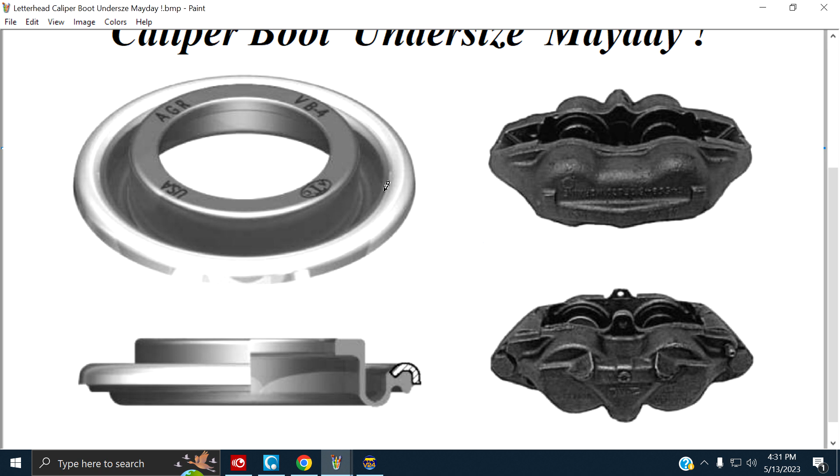Anyways, let's get that out of the way. See this hard boot here on the left? It presses into the bore in this caliper. It's a 4-piston caliper, I'm showing it. One way is up and one way is down. It's upside down, see it? This one here is up and that way is down.

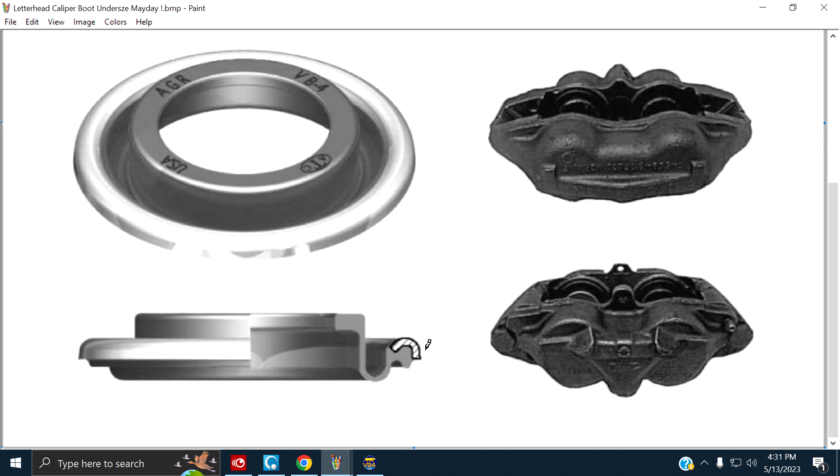Here's a cross section of the boot. I cut out a section here, and that little black outline there shows you the metal. Alright, are you getting my drift?

Alright, I'm gonna lay some shit on you. Hang on. Alright, I'm gonna take you to my CAD system. I'm gonna show you that boot. Alright, first of all...

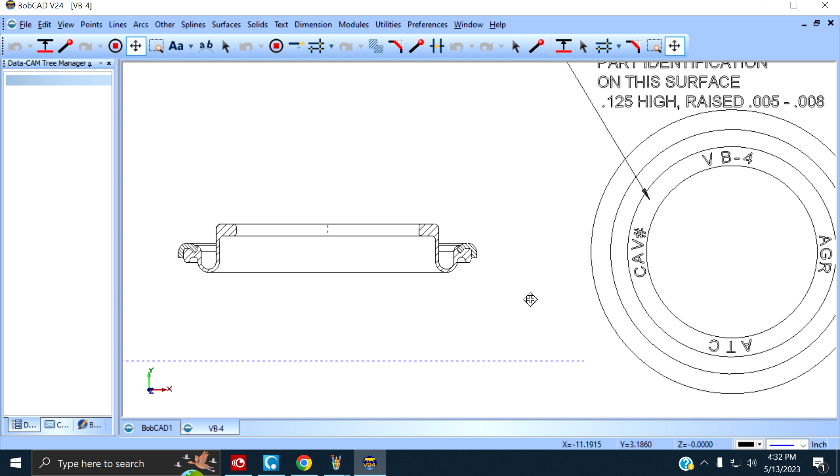This is a top view of the boot. It shows the identification on it: the part number VB4. What's that? Vintage boot number 4. That's the AGR manufacturer's code. That's the cavity number, and that's the company identification, Acushnet Tool Company.

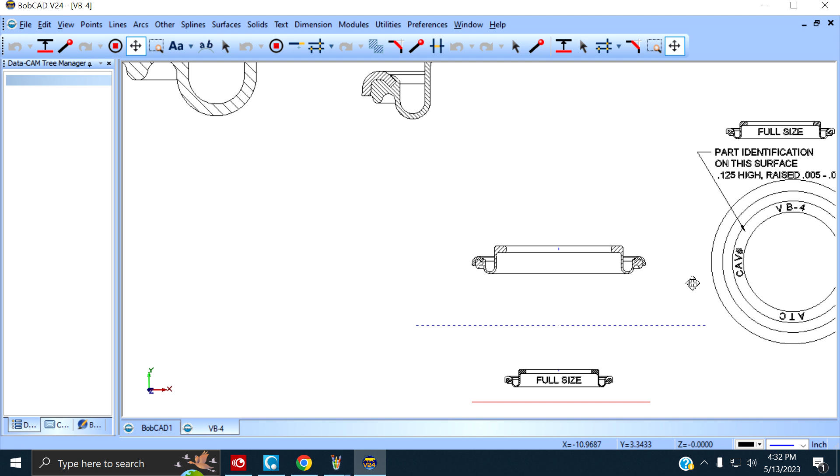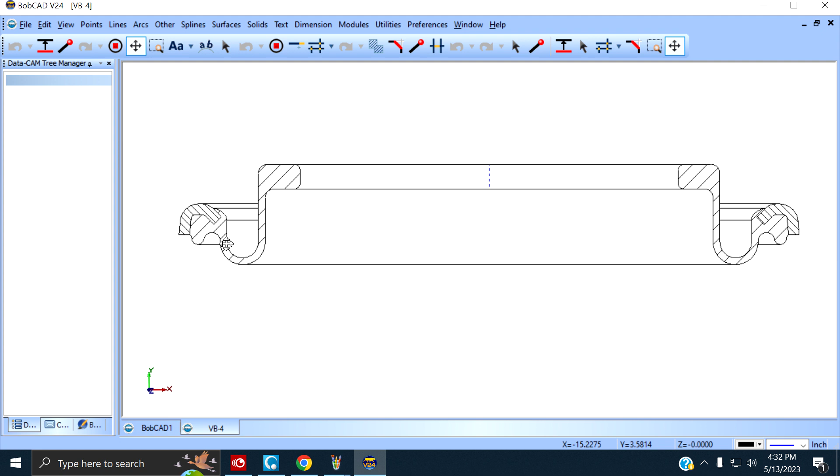I'm going back now, back to 2003. We still do this, you see that? That's a cross section of this view here, see, it's a cross section. The hash marks or cross section marks are showing you that's all rubber. This is showing you it's steel.

Let me get down to where I'm working. My objective is, well, let me get you down here. I'll start with my bullshit down there, it's my scribble sheet, I scribble all over the place. Let me start here, I'm showing the boot upside down.

The problem, you see where the mouse is? That diameter from there to there is 10 thousandths of an inch too small. We got a lot of them in stock. Somehow it got by us, and we got quite a few in stock and customers that want the product.

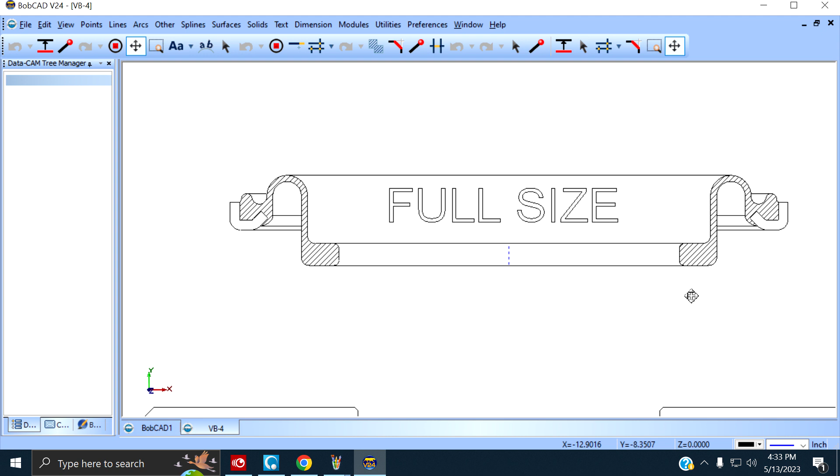It's an easy fix: build the new die and stamp some new ones. Problem is the time involved to get it done. In the meantime, customers are not too eager to wait. So what I gotta do is make these bigger by 10 thousandths, and I'm golden until a die can be built. You see that? Okay? How am I gonna do that? Let me show you.

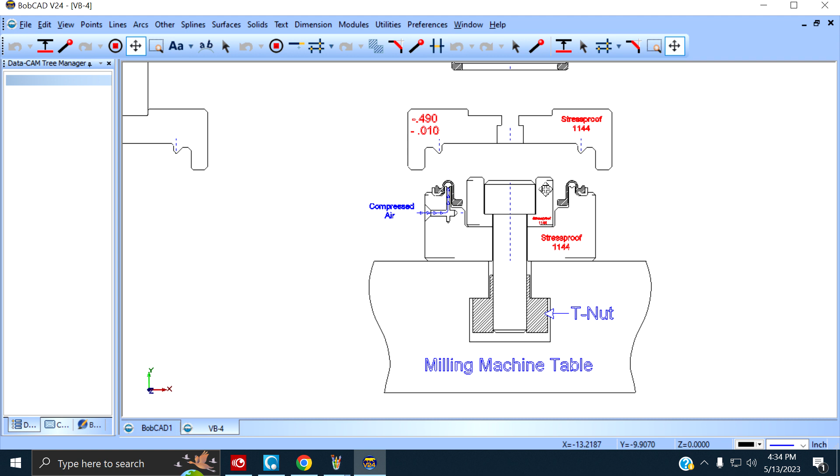Alright, let me just do this. You see 2 parts here, one above the other. You see a milling machine table here, see it here? It says milling machine table, T-nut. These are all round parts. They're made of stress-proof, 1144.

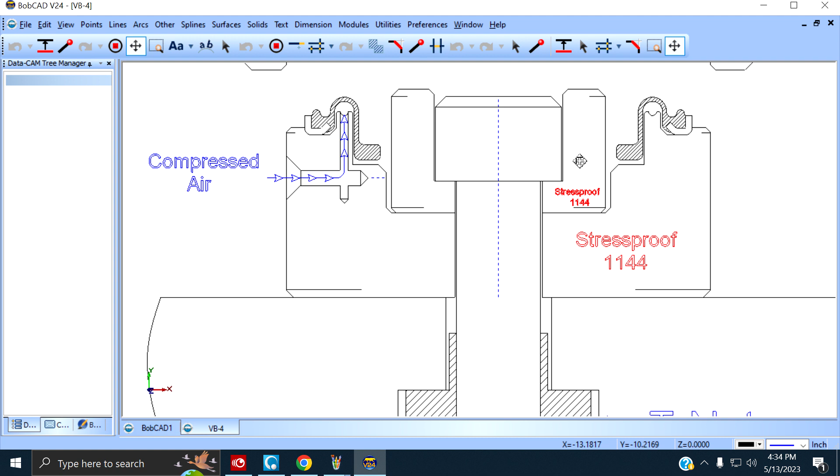You can see this one and this one. There's only 2 metal parts here. That's a 1/2 inch 20 socketed cap screw. Alright, I'm showing you that.

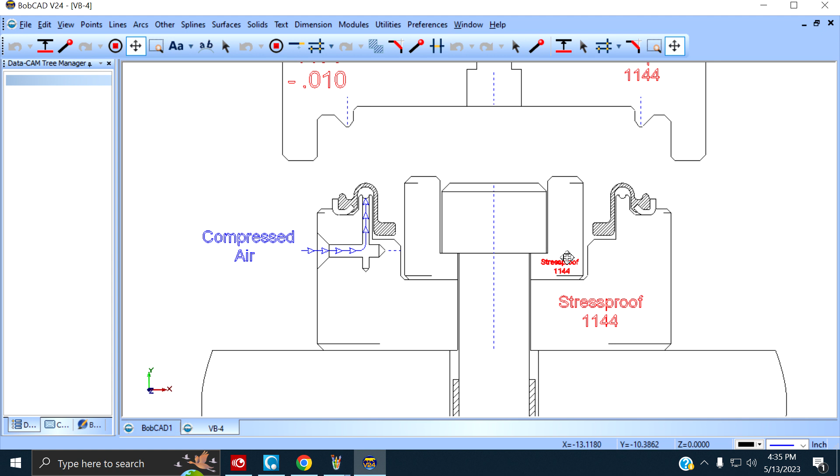Now this can come apart. You can see this piece here can lift off, right? Right now, that piece and that screw are pulling all down on the table, so it's secured to the table. Alright, let me show you the piece above it.

Obviously, stress-proof 1144, alright? It's a match for the bottom, same material. Why? Low carbon, good machining, tough material. Perfect material for this job, alright?

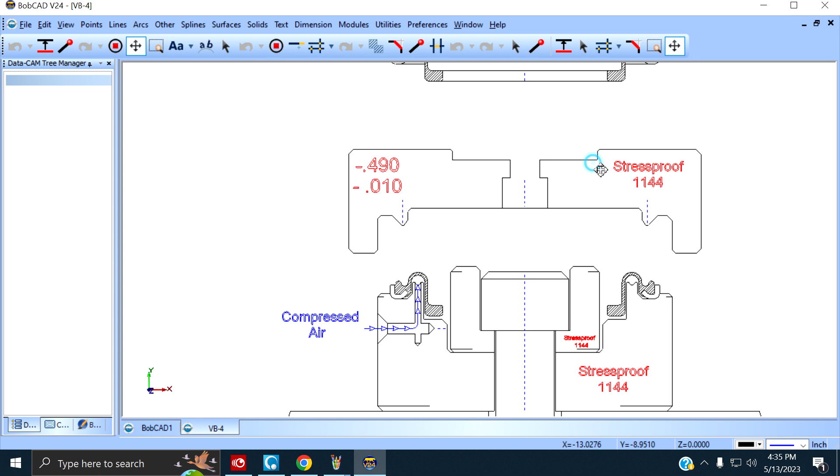How am I? Now here's what I gotta do here, see it? Here's a cross section of the part on one side only. I gotta take this metal, this is metal, this empty place, and I gotta bend it out this way by 5 thousandths.

Can it be at an angle? Absolutely, alright, not a problem at all. Matter of fact, I prefer it at an angle. So how do I bend it? Right, how do I bend this out this way?

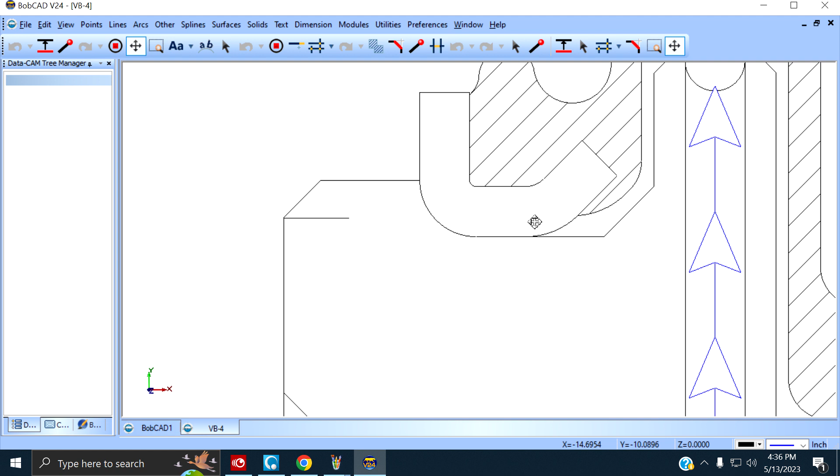Alright, well what I've done is I've contained it, you can see it here, in this metal, and I'm going to push it this way at an angle. Let me show you how I plan to do it. Maybe you guys got a better idea, but I'll show you. Alright.

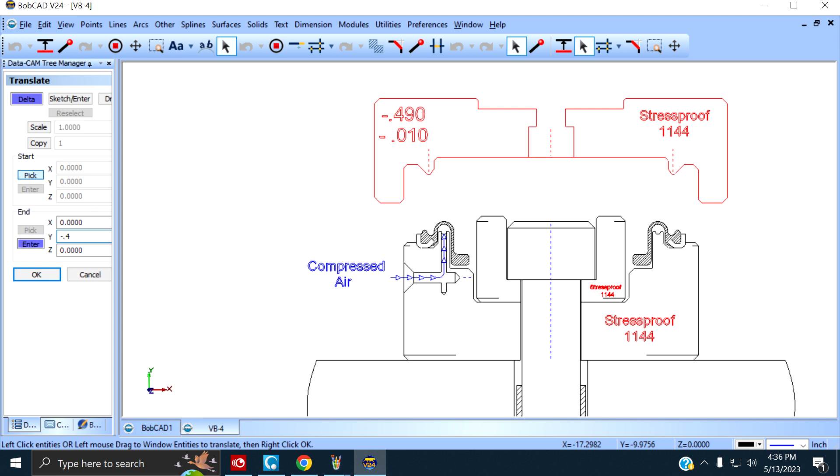As you can see, that's an angle, that's 45 degrees right there. Obviously, the other side is 45 degrees too. It's symmetrical, all right?

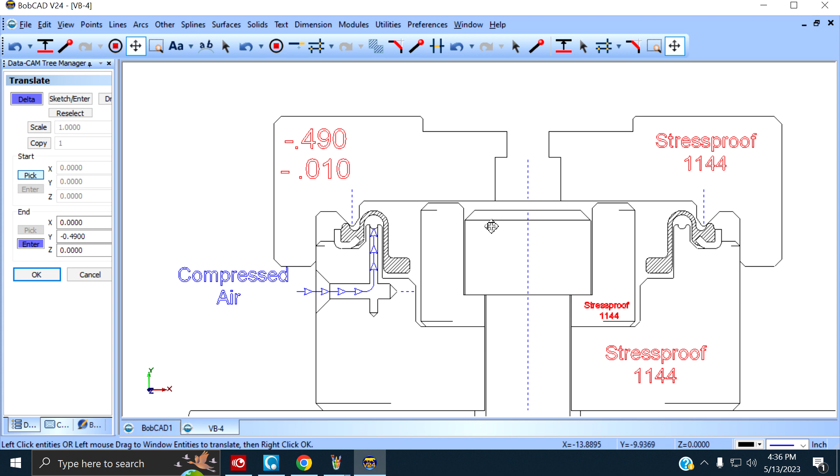You see it? It's just touching here, but you notice there's a gap here. See the gap above this piece? That figures into the picture here. I'm going to show you what I plan to do. Let me go back.

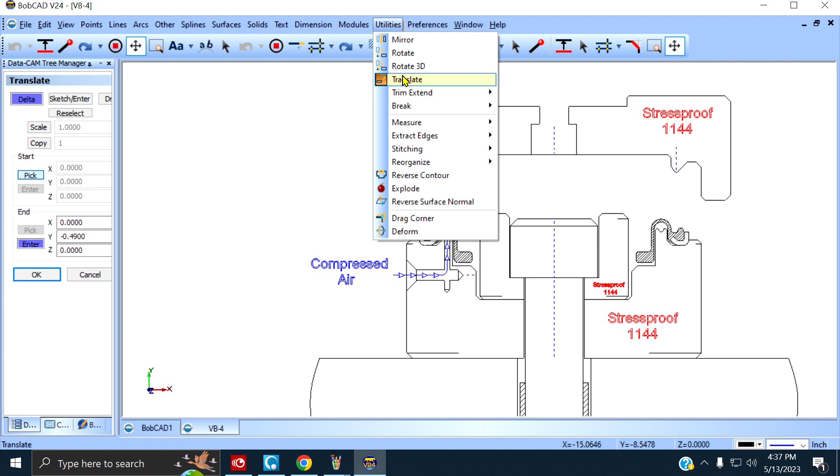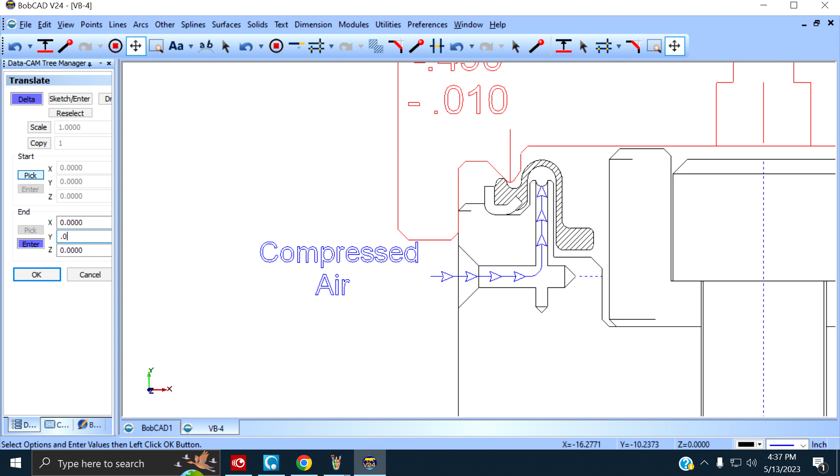Now I'm going to show you, I'm going to come down this way. Oh, by the way, you see this red? This diameter, this ID, just fits over that OD, holds everything in line. We use the term register - it lines it up anyway. Let me do this. I'm gonna drop it down some and show you a little bit of the action here.

Oh shit, hang on. I do that a lot.

Now I'm gonna push down 10 thousandths. See it? 10 thousandths, 10 thousandths. Obviously this rubber's gonna go this way and everything's gonna tend to go that way, right? I don't think it's gonna take a hell of a lot to do it, you know. But anyways, that's my plan, okay?

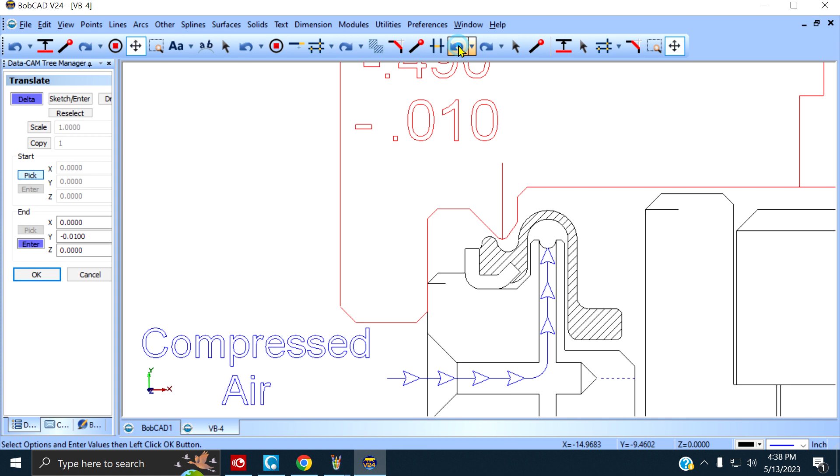Well, let me show you this now. Let me get this out of the way. Now, here's what I'm saying. You see this? The top of this, which is above. Let me do this.

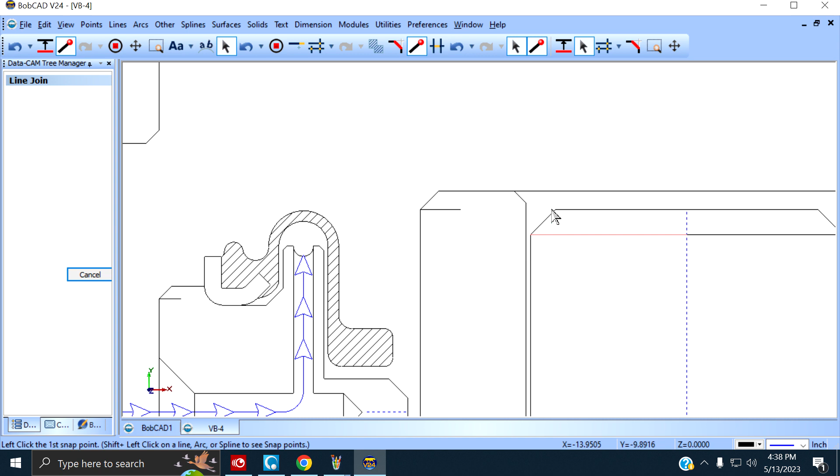You see the head of the cap screw is quite a ways from the top of that surface. I can take some off of that surface and not affect the socketed cap screw. Let me bring this down to where it just touches.

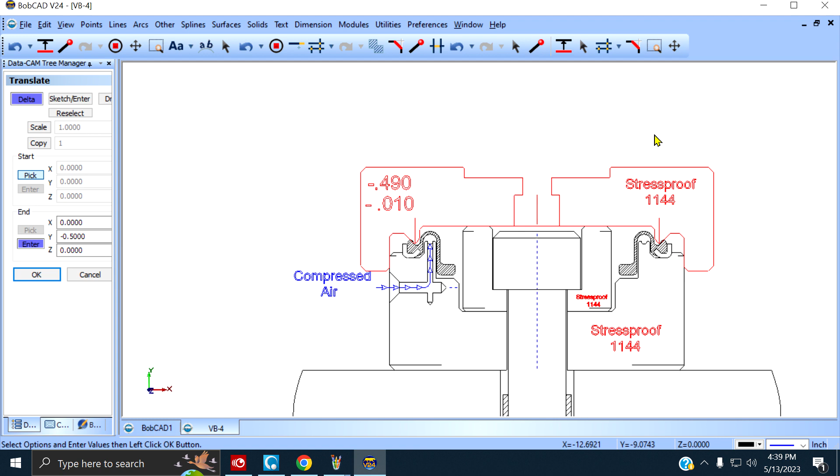See that this is touching there, right? And you can see that this angle is just into that rubber by a little bit, right? Obviously, I'm going to push down. If it doesn't move, I'm going to remove it.

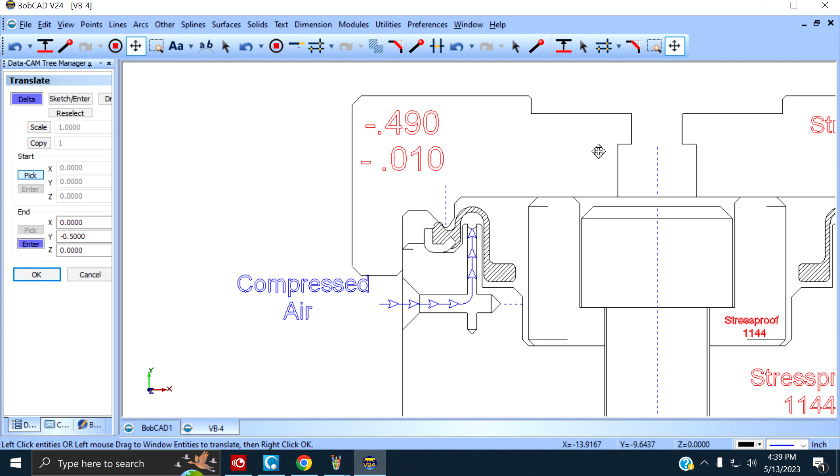Take this piece out, see this piece here? Take it out, face a little bit off, put it back in. I may have to do it multiple times, but once I get that out 5 thousandths, it's fixed, no problem. All I have to do is push down to the stop. How do I do that?

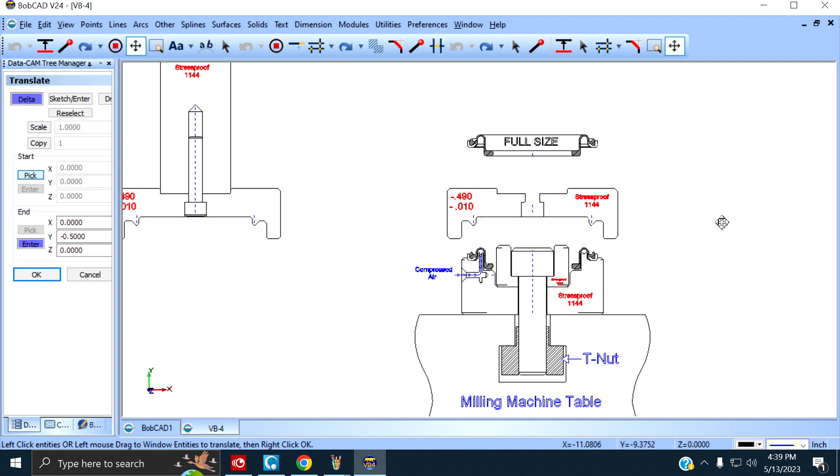Now, this is a logistical nightmare. How do I load it and unload it? Let me lay it on you.

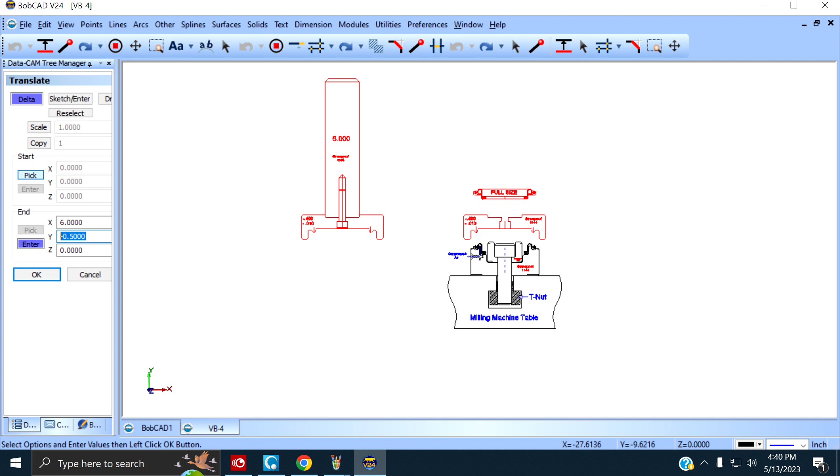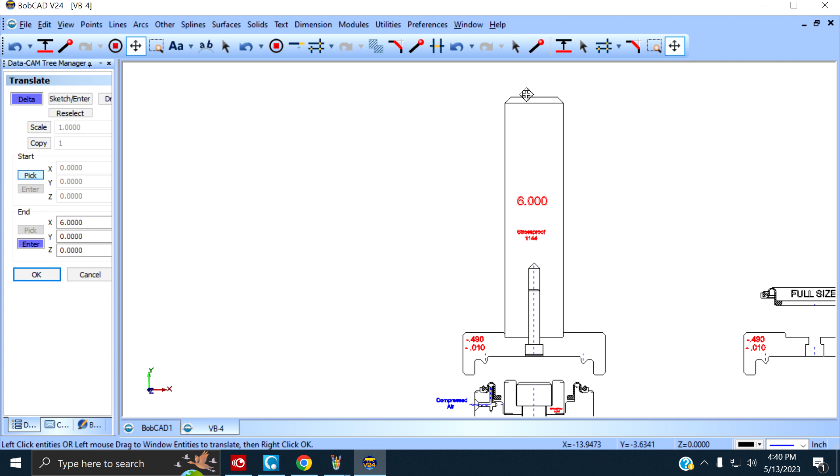All right, you see this? That's the handle. It's 1.25 inches diameter, and it's tall, so a guy can hold it in his hands, have the top sticking above his hands, so he can just hold it.

And then what he does is he drops it on here. It's guided in by this OD, and he gives it a whack with the hammer. It hits the stop. He lifts it up. Only takes a couple of seconds, right?

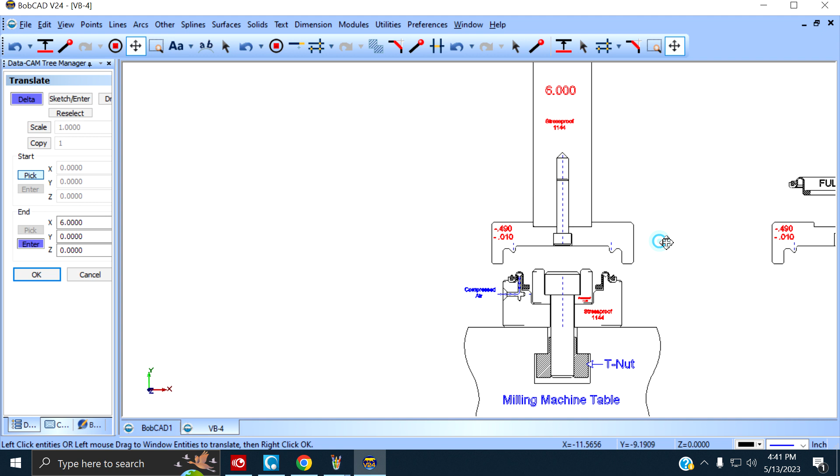So here's what I got in mind. I'm going to drill one hole, as you can see, a vertical hole, as you can see. And I'm going to make an annular groove. See that radius? That's a groove all around.

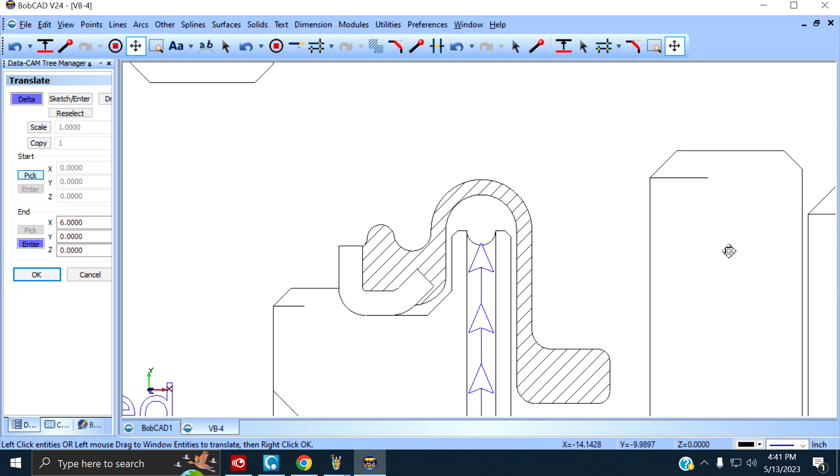Let me take you to this side. It goes all the way to this side. You see it? So it's circular around the part.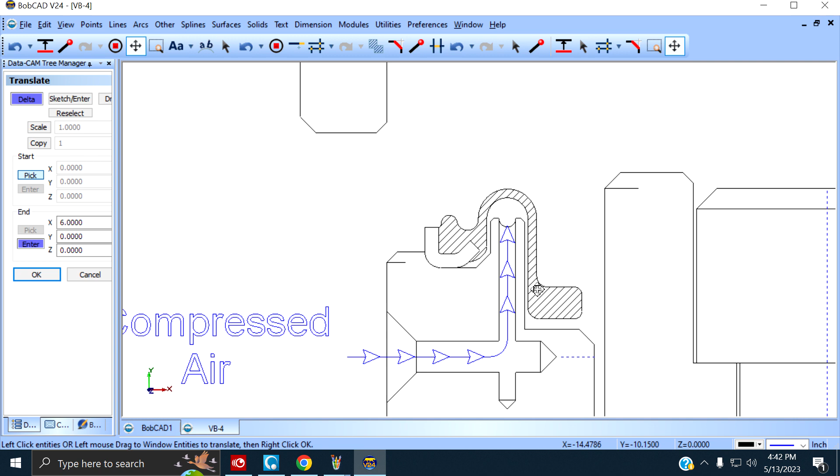So when the guy lifts it off and everything's out of the way, we take an air hose with a rubber tip, put it in there, poof! Hopefully this sucker blows it all off. There's nothing here to hang it up. See, we got clearances everywhere. Takes it off, puts the other piece in.

Guy's got it in his hands. Kapunk, it's over, all right? To me, that's the most cost-effective way for these circumstances.

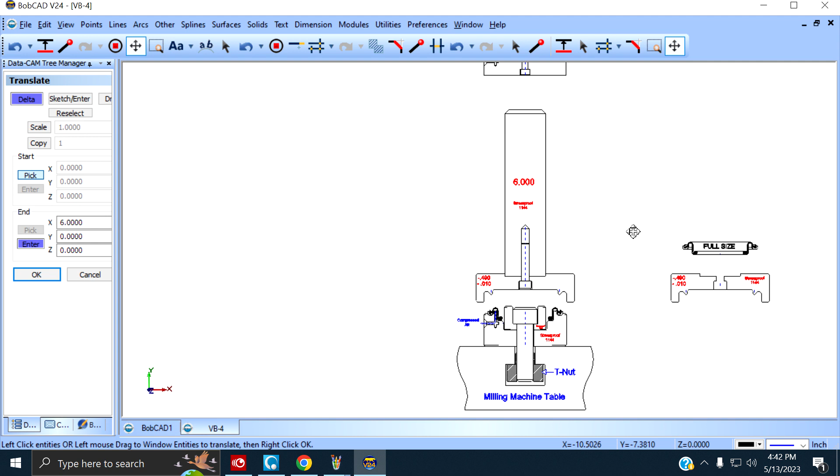Can I make this automated? Absolutely. Will it cost me a fortune? Absolutely. This makes good sense to me. But will it work? How the Christ do I know? Most likely will work. But what I'm saying is, if somebody's got a different idea, right, I welcome it, you know?